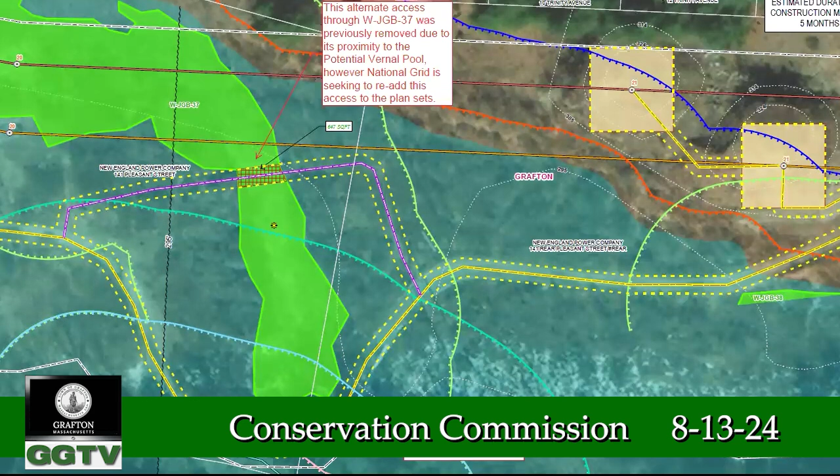Thanks. So do I have a motion to have a minor change for Fisherville Pond for New England Power, with the recommendation for the condition we just discussed? So moved. Second.

We have a motion and a second. Emily, yes. Travis, yes. Jonathan, yes. I am also a yes. The motion carries.

Okay. Next one up is Lake Quinsigamond, Flint Pond. Request for a 1-year extension. Leah, want to bring us up to speed on this one?

So the Lake Quinsigamond Commission has their 5-year management plan for the lake. They intend to conduct their in-lake chemical treatment in Zone C, which is the Grafton area, this year, upon approval from Natural Heritage, following the original plan they laid out in the NOI. They will also be doing the annual drawdown this winter as they work on the next 5-year plan with Natural Heritage.

So their order with us was issued as a 5-year order, plus they had some COVID tolling, so it's due to expire in September. They're asking for a 1-year extension to cover the activities we just talked about. Then, once they iron out the next 5-year plan with Natural Heritage, they'll come back and either seek a multi-year extension of the same permit or close it out and go for a new order of conditions, depending on how the scope shakes out through their process with Natural Heritage.

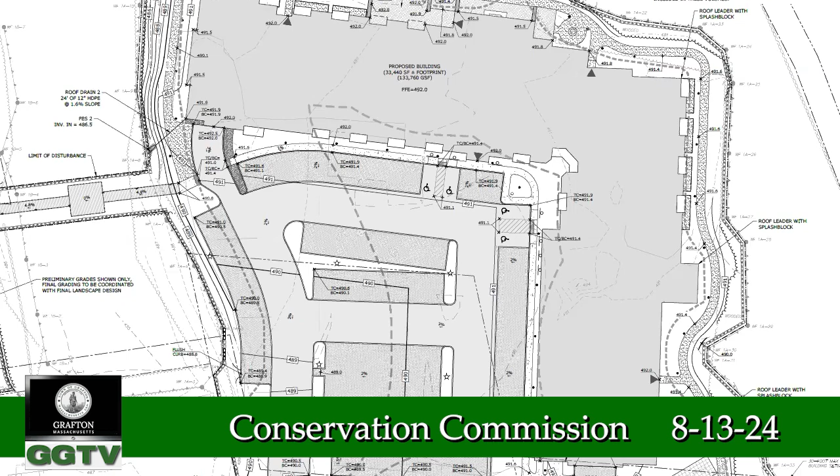And quite a bit has changed since then. We've been working through planning board review comments, through peer review, and some changes to the plan because of zoning. I can walk through all of those for you tonight. Jan, if you want to go up a couple sheets to the overall layout plan, that may better tell the story.

There we go. All right, so you'll see the right-hand side of the project didn't really change a whole lot. The building is still located further back in the property, extending towards Upton Street, nestled in between all of the wetland areas.

The left side of the project, at the auxiliary parking lot, is where we've seen the most changes. These are due to a couple things. There were some zoning requirements that we were not able to waive or get variances from, so we were adjusting some of our parking layout. We also decided to retain the barn on the western side of the project, which changed the parking lot as well. We had some fire department coordination, and all of that trickled down into the plan you see now.

What that means for our stormwater approach wasn't a whole lot. We're maintaining the same stormwater approach using pervious pavers. On the west side of the auxiliary lot, there are 2 surface basins that are really shallow, only a couple feet deep because of the shallow groundwater conditions, but they are there to meet our water quality requirements and our infiltration requirements.

We did receive a letter yesterday from Graves Engineering that gave final sign-off on the stormwater design in compliance with the bylaw. There were a couple of items that we noted as still outstanding. They are minor in our opinion, and I mentioned to Leah that we would consider requesting those as conditions of approval if we get to that point. But as far as the stormwater peer review goes, that part's been completed.

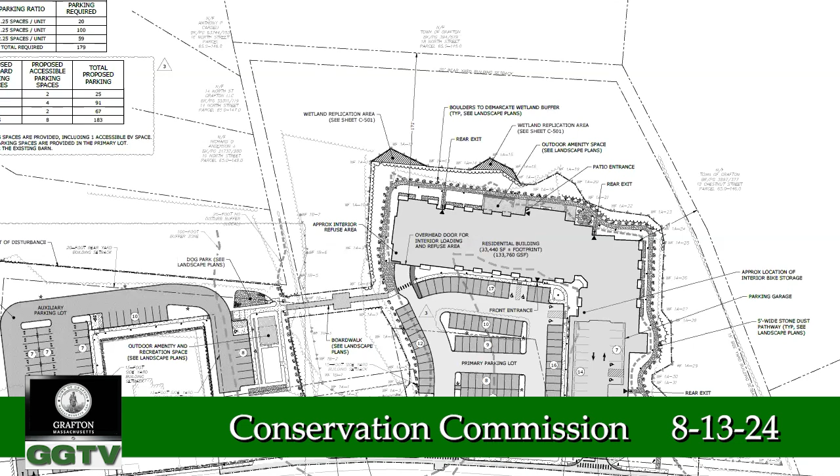Thank you. So you'll see that there is still the boardwalk that we originally proposed, connecting the auxiliary lot to the primary site area. We have attempted on that left-hand side to stay completely out of the 25-foot no-disturb zone. You'll notice that there's no longer a fencing line, but there are some round things indicative of boulders instead of fencing. That was a request from the planning board, to not use timber fencing, but something a little more durable. So we proposed boulders along the 25-foot no-disturb on that left side.

We'll move over to the right side in a minute. But the work between the 25 and the 100-foot buffer zone here includes some of our outdoor amenity spaces and landscaping, where we have a dog park, a fenced-in dog park, some outdoor seating area, a lawn area for flexible space, a bocce court, and then you'll see that there are now parking spaces within the 100-foot buffer zone here.

What we've been able to do with grading is we're not discharging that stormwater to the wetland. We're able to shift all that stormwater to the western side of the project, into those 2 void areas that you can see at the top left corner of the property line there.

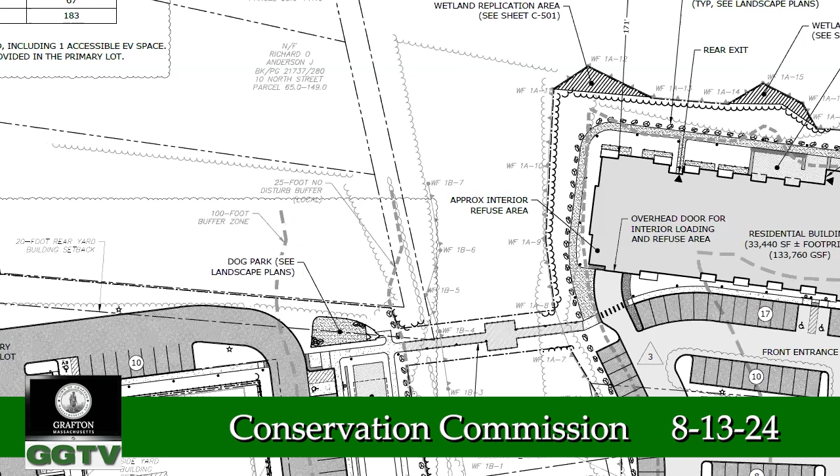On the right hand side, really not a whole lot changed. We did again change the fencing type from that timber fence to the boulders. We're still proposing stone dust walking path around the building. The amenity spaces out back, that has not changed. If you, Jan, can pan over further to the right to see the back of the building, I don't think anything really over there changed.

We tried where we could to pull the stone dust walking path as far out of the buffer zone, toward the building as we could, to kind of reduce those impacts. And that boulder demarcation is on the outside of that path to note the limits of the maintained area versus more natural growth areas, between that line and the wetland buffer line, or the wetland boundary line, I should say.

So with that layout, that then trickled into our phasing plan. While we haven't really changed the components of the phasing and what's going to happen when, it did change what that plan looks like. We did add some areas to that plan to call out each phase having an approximate disturbance area. None of them exceed 5 acres.

Getting into probably the nuts and bolts tonight, with these changes there were some changes to our impacts. We did provide an update to that in our most recent letter to the commission. We took a harder look at what the impacts are associated with that boardwalk work - what's permanent, what's temporary, what needed to be replicated. What we've proposed at this point is a total of about 392 square feet of permanent impacts associated with tree clearing and boardwalk installation.

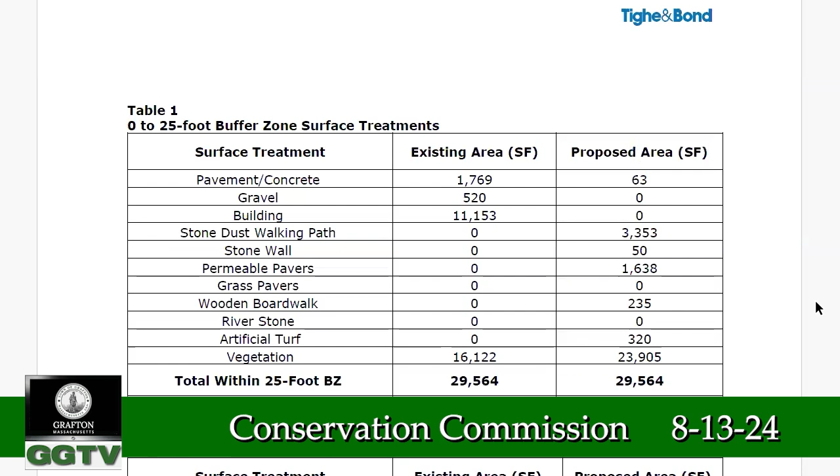I think the goal with this part of our exercise was to - well, first I should clarify and say table 2 should really say 25 to 100 foot buffer zone, not 0 to 100. So you see the math did not work out. But what I wanted to point out was both in the 0 to 25, and then in the 25 to 100...

the important parts are we're removing pavement and concrete. We're removing all the gravel that's back there existing today. And while we're increasing the building within the buffer zone, remember that's clean runoff that we're able to put towards the wetlands, to continually feed and hydrate those wetlands, but not having it be gravel runoff to the wetland. You'll also see at the bottom of each of these tables, the vegetation in buffer zone increases in both the 0 to 25 and 25 to 100.

I guess before I go on to some of the outstanding issues that both Leah and Mass DEP had identified, is there any questions on this part of it? Or do you want me to keep going?

Well, why don't - this is good. I have a couple of quick questions, I'll check with others. None of these are earth shattering, but just for pure clarification for anyone on here: when you're looking at the 0 to 25, based on the existing conditions, you had 11,000 square feet of building, in the proposed condition you have 0 amount, so all the building is getting removed from 0 to 25 for that area. Just want to make sure I understand, for 25 to 100 feet the building is being increased, but the 0 to 25 no-disturb area has all building removed from it.

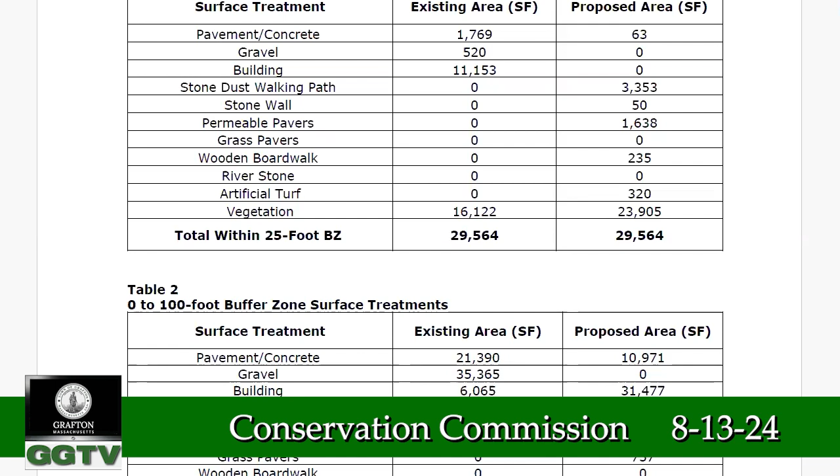Correct, and that's why I was thinking - you might have bigger lawnmowers, but they're not 4 feet wide. If we go back to the site plan and look at those areas, you're not going to get the biggest pieces of equipment back there anyway to mow those. If you're riding on that stone dust path, they might use residential style mowers or a small commercial style mower - it doesn't have to be a tractor.

So I would argue that if they're opting to go with boulders and not a fence, the boulders should be spaced close enough that it's obtrusive to getting equipment over it, because that's the purpose of the line of boulders, right? So Leah, what's the standard one that we use in our conditions? Let me find it, give me a second.

Okay, and is there a size to the actual - I mean, like cobbles and pebbles are different - is the boulder a specific dimension? I know these are natural items or potentially broken apart larger stones, but is there a dimension given for the typical boulder, because we're defining it. If it's too low and flat, and they're just pieces of slate lined up out there that don't really pose much of a barrier - is it a boulder? Is it a beach ball? Or is it something else?

So a lot of times when you're doing the boulders, there's two components. One is you just do a minimum weight, say a minimum of 300 or 400 pounds, so no one's going to go out and just move it. The intention is that you're going to place it with a machine, and you could move it with a machine, but it's not going to get moved by a couple people pushing it.

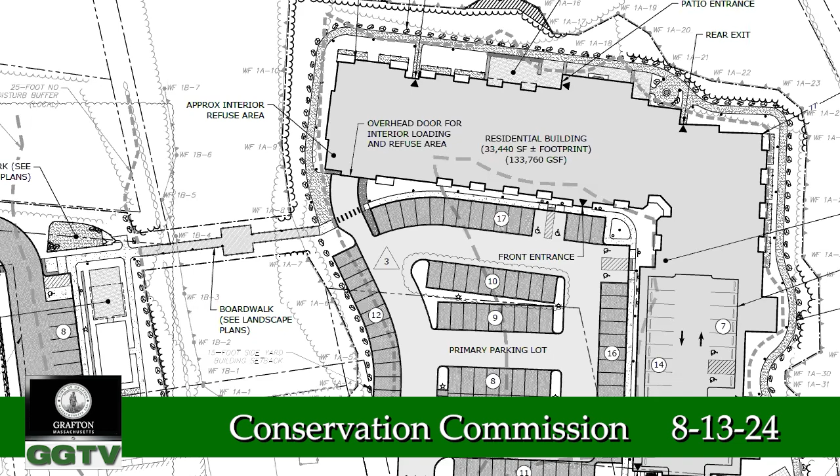Just a quick clarification, the parking spaces moved, but no additional parking spaces added? Good question, I don't remember what we last had before the commission. Let me pull it up. It looked like we had 188 spaces proposed previously, on the last set of plans you had seen. This set revised it down to 183, because of all of the zoning requirements we were trying to meet. So we have 179 spaces for the residential use, 3 spaces for short-term parking, and 1 space for the barn. I'm just checking that additional parking spaces were not added. Correct.

All right, Leah, now the fun stuff. So as far as the findings go, they seem to be fairly straightforward, do you want to review those quickly? Sure, so I have 2. One is per the applicant's testimony, soil conditions on site could not support helical piles for the boardwalk, which would have avoided crane impacts. And two, that the soil remediation work for lead beneath the existing garage is to occur as part of this order and permits.

So just quickly around, any questions or comments on these findings, or if you think there should be any others? Emily, no, thank you. Travis, nope. Jonathan, if you're not using helical piles, is it sonotubes? What's the base of the boardwalk?

I thought we were using micro piles or some basic pile installation for the foundation, so what's the foundation system for that boardwalk? I think the original thought was to use helical piles where we kind of screw them in, and because of the soil conditions those weren't allowable. So now these are steel piles, steel tubes driven in and then filled with concrete. I think they're 6 inches, 8 inches, somebody else on the team can confirm that with me. But I think that was the finding, that the helical piles, which are smaller, less disturbance, wouldn't work on this site.

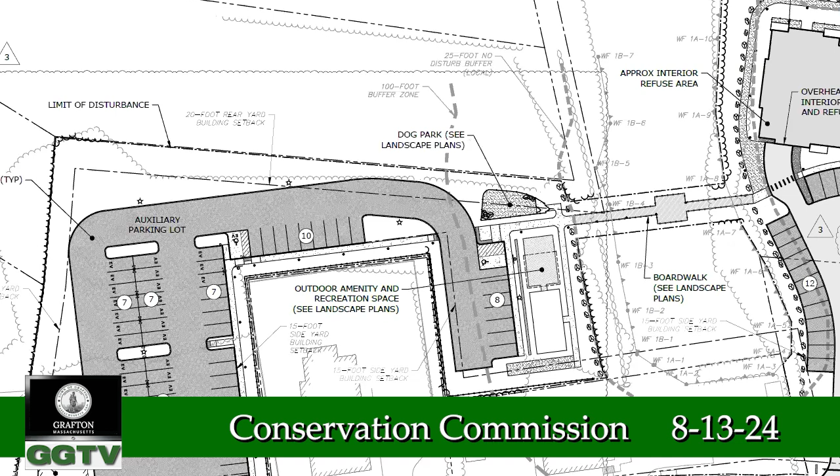Do I have a motion? So moved. Do I have a second? Second. We have a motion and a second. Roll call vote. Jonathan, yes. Travis, yes. Emily, yes. I am also a yes. The motion carries.

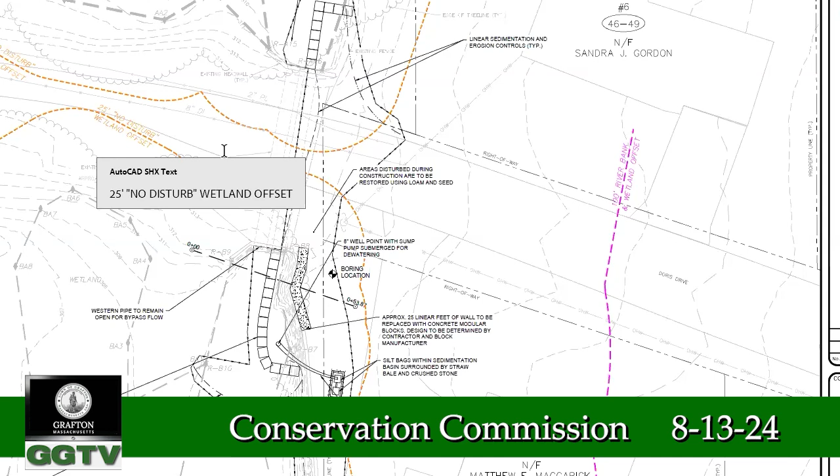As far as findings go, Leah, it's pretty straightforward that 80 feet of the permanent bordering land subject to flooding impacts is a surface area of the top of the new wall. That's the finding we're going to make. Is there anything we should discuss on that? Nope. Okay, then we're going to start with special conditions.

Prior to getting to the special conditions, I am just going to put it out there: if the public has any comments or questions, please raise your hand. We're happy to either answer those or have the applicant answer those. In the meantime, we're going to talk about special conditions.

Leah, you want to go through the special conditions quickly? I think you've pretty much already talked about them. First, prior to commencement of work, the applicant shall provide a stamped plan for the retaining wall. Second, all NHESP conditions from their July 1 letter—I will be copying the language of all the NHESP conditions from their letter—and the commission is to receive copies of the turtle protection plan and NHESP's approval of it prior to commencement of work. We would also like copies of the annual reports that NHESP asked for. Third, the work shall occur during low flow periods.

All right, so first to the applicant, do you see any of these special conditions as an issue, or do you have any questions on them? No questions. All right, thank you. No issues. All right, thank you. And based on that, anyone from the public?

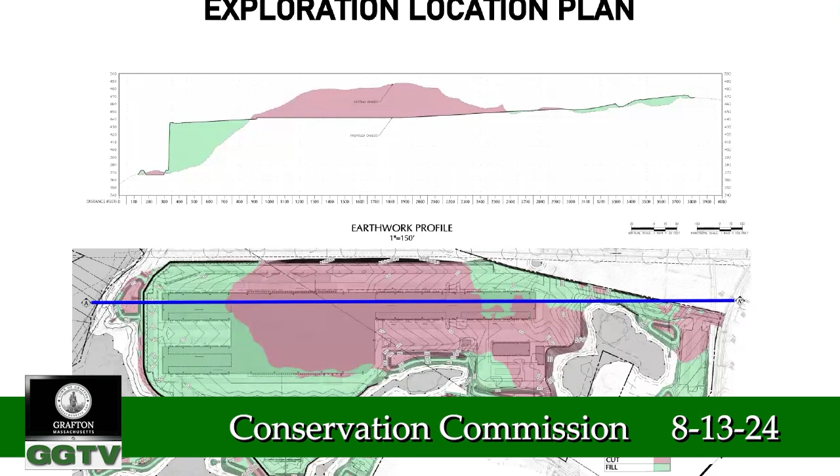And again, there'll be temporary sedimentation basins along the way as well. The contractor will be responsible to follow the SWPPP plan that is developed, and utilize temporary seeding and mulching, diversion swales, things of that nature as needed along the way.

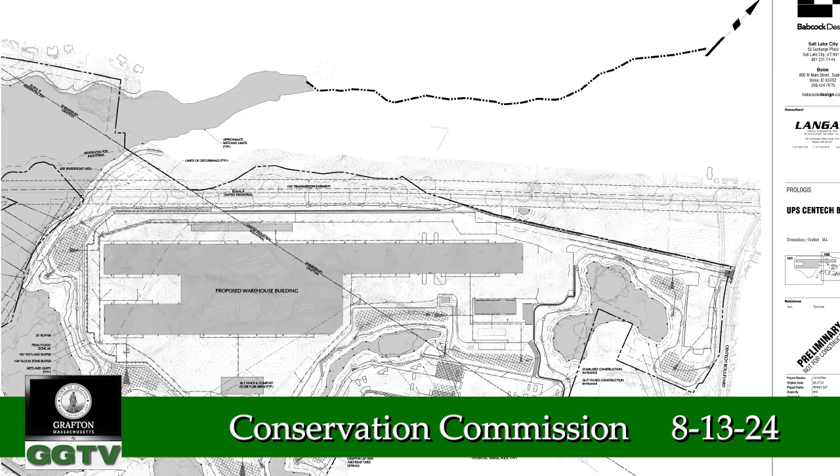So next slide, please. Okay, next topic on the agenda that I had shown first on the first slide.

Last meeting, we discussed the wetland replication area. If you recall, on the bottom left area there, we're showing the existing depression — an existing isolated bylaw wetland that is being filled. Our original plan was to replicate that within the westernmost stormwater basin, but based on some conversation we had at the last meeting, we've taken a bit of a different approach, and we are proposing to relocate that to the new location shown there as proposed replication.

We have a slide that shows this zoomed in a little more, but I want to call attention to the proposed versus existing area and volume. Our proposed replication area is 7,400 square feet versus the existing 7,200 square feet. Our proposed volume is 9,350 cubic feet versus the existing 6,770 cubic feet. That's important because it's an isolated wetland, but also a bylaw isolated land subject to flooding.

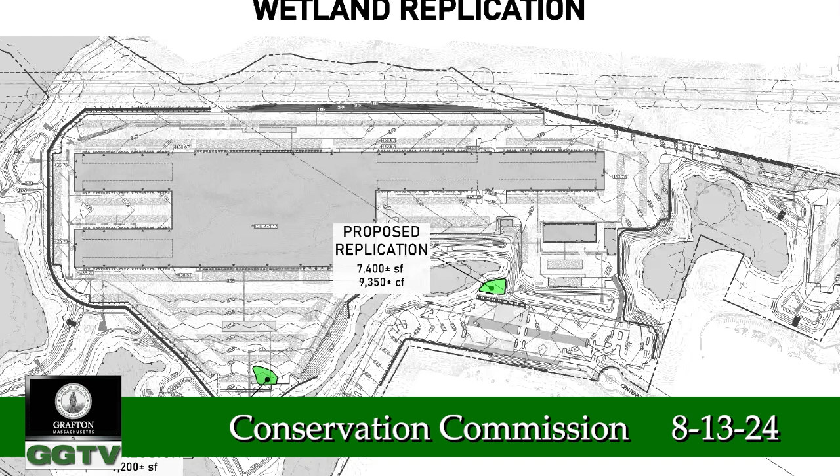Next slide, please. You can see that wetland replication area here in the light blue shading. What we're proposing is a detention stormwater basin just to the east of it. That basin takes only roof runoff, so it's clean water coming in. It would be managed through an outlet control structure with a low flow orifice, and the water would slowly outlet to that wetland replication area.

It's a little hard to see on this slide, but in the packet we provided there are details and cross sections for the wetland replication area. The inlet would not be typical, not like a flared end section with water just coming out. We're proposing a T-pipe off the end with perforations encased in crushed stone, so the water leaches through the stone rather than creating scour potential. On the western side would be a level spreader type curb as an overflow. The volume of the 9,000 plus or minus cubic feet I mentioned would be below that outlet.

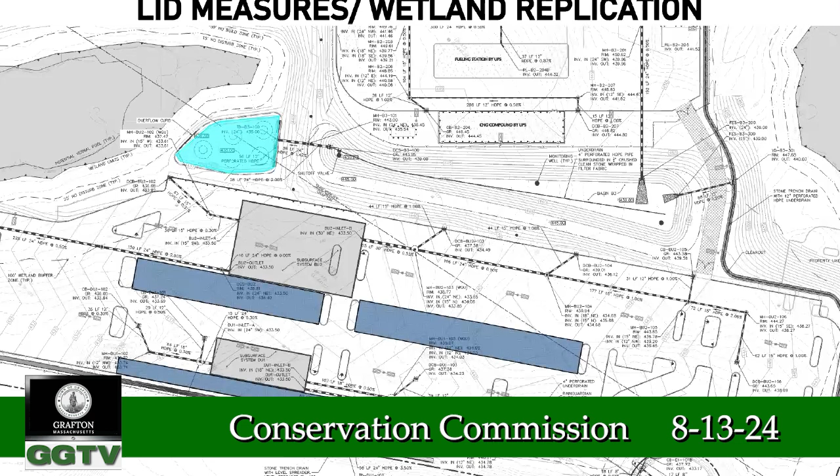Just a few miscellaneous items that we've discussed already, but we want to document that they're in the plans. One is shown with this blue circle, and that is the shutoff valve on the stormwater line that conveys runoff water from the maintenance area and the fueling area of the facility. On the right-hand side, in that rectangle, we've added a note to the plan for the truck wash, documenting that it will have a rainwater harvesting and reuse cistern.

Okay, next slide, please.

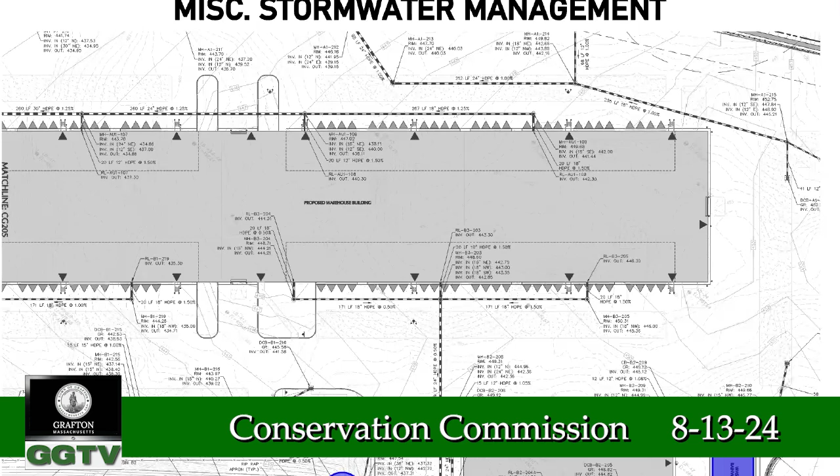One thing that we didn't have in our packet last week, but we wanted to show because there will be supplemental information provided with our final stormwater report: as I mentioned before, DEP had requested that we perform a few more test pits to get better coverage in some of our stormwater basins, and Graves had commented that we should perform an additional test pit in the basin that's actually in Shrewsbury, furthest to the plan east here, just south of our truck parking area. So we went out last week and performed about 11 additional test pits to get a little better coverage.

As you can see, also in our employee parking lot, we were able to pick up some more test pits, just to confirm soil conditions and restrictive layers where we're now proposing to do the pervious asphalt. So we have some good data there.

I think that was the last slide. I will say that based on the work we've been doing, we are still finalizing the plans, and we'll be updating to show all this information that we've presented here tonight. We'll be providing formal plans and an updated stormwater report for record to document everything. So happy to answer questions.

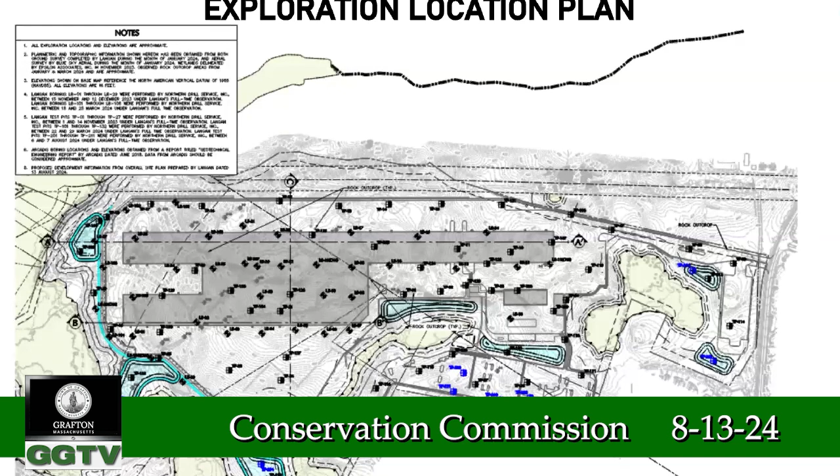All right, great. Jan, if you go back to the beginning of the presentation, I think it'd be easier to flip through and go through my questions. I'm not expecting a full answer when I ask them, just things to think about. Some of them are fairly straightforward, and some you're probably still working on, but I'll start, and then the rest of the commissioners can chime in.

You mentioned the type of silt fence you're using, wire backed. Is that a super silt fence? Yes. There are two types I've used before: one is essentially like a chain link fence with silt fence on it, and another is more like a wire mesh backed, standard silt fence with metal stakes instead of wooden stakes. What we've detailed is more the latter, the traditional wire backed one, not the chain link. I've heard them both referred to as super silt fence, but the wire backed one is pretty standard.

I just wanted clarification on that, but then I had some general questions on this particular slide. I know this isn't all the detail you'll have, but I understand you want to come in, cut a road in, and set up a staging area. Then the next step is putting in the erosion control perimeter, which means cutting some roads in to get back there. I'm just wondering what your plan is for how you're going to install the perimeter erosion control from your staging area.